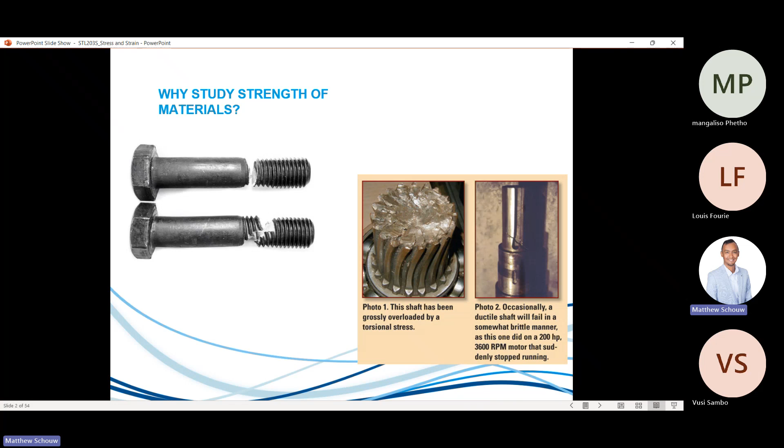This was a shaft which was grossly overloaded by torsional stress, that's like a twisting motion, and it just completely snaps off. By the way, that's a mechanical element, essentially a shaft. So again, we want to make sure whatever mechanical structure we have is going to last for some time. That's the purpose of this.

I just want to give you some examples of mechanical structures. This is from Wikipedia: boilers and pressure vessels, coaches and carriages, cranes, elevators, escalators, marine vessels and hulls, meaning the actual ship. There's a lot more mechanical structures. So the mindset you must have when doing these things is that it's all about having a structure.

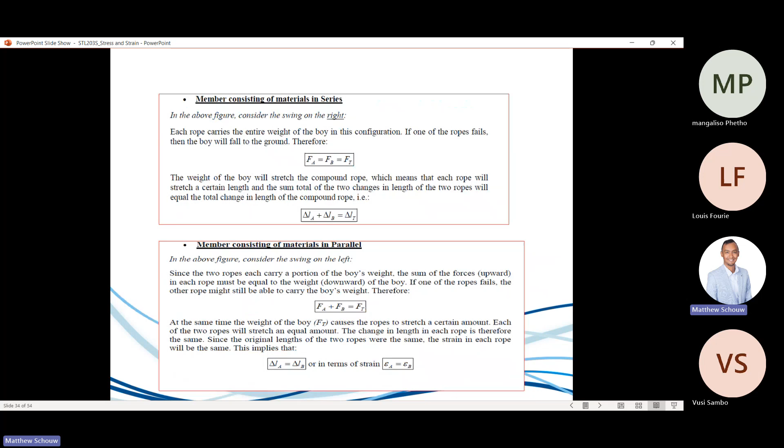I'm looking for a particular image now, I'll show you what I mean by mechanical structure. There's a lot of stuff I have here, let me show you here. Okay yeah, where is this? Like this, this is a maritime thing. Where is this, allowing? Someone allow the person in now? Yeah, I can't even see. Okay cool, where's my slide now, just took 3 minutes off now.

Excuse me guys, is this person... I don't know where this person is. Don't want to get into the meeting, but now I can't even see where they are. Oh there we go, okay, I'm allowing them, yeah there we go, okay.

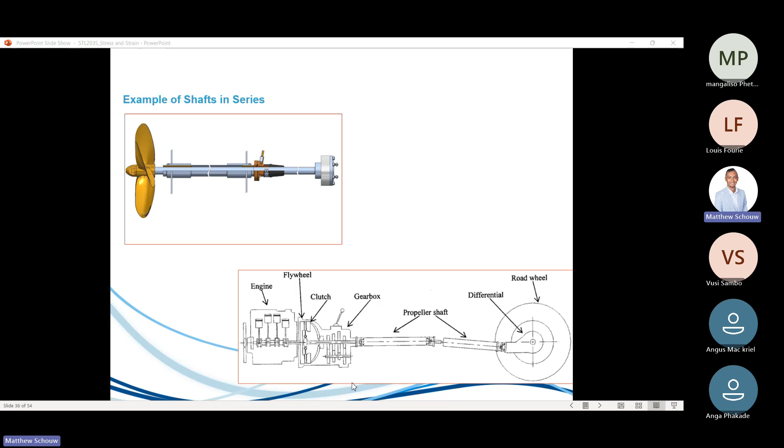It's all about looking at an element under the influence of an externally applied load. So we have an element, being a shaft maybe, or some kind of structure. We apply loads to it, and then we can see how it behaves. Obviously, when we're seeing how it behaves, we don't want that structure to fail. Like, what are its limits?

Yes. So that's the mindset you want to be using here. When we do the analysis of a structure, you look at a particular structure and determine what loads are present on it, and then based on those loads, which all have their own set of equations, we'll be able to determine the size of the element we must design, or predict when that thing will fail. So this is what the whole course is essentially about, but in different individual components.

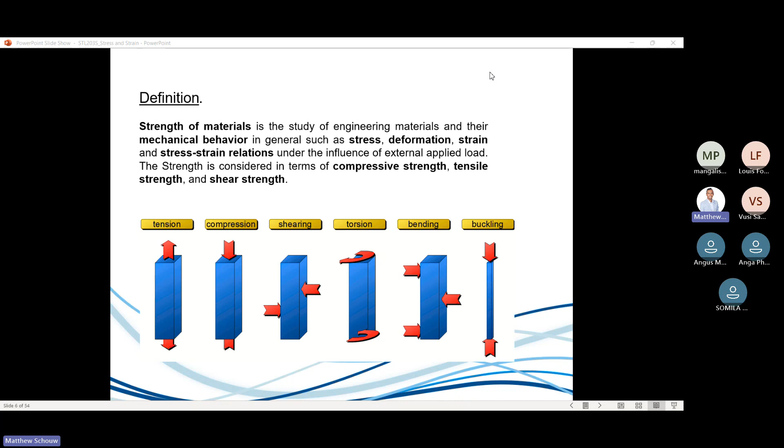I'm still following. So what I'm going to do now is move on to actually solving problems. I'm going to do a small warm up just to give you a feel of how I conduct the tutoring lessons, and then I'd like us to work through the problems I've sent you. But please, guys, engage as much as possible. I really want you guys to be successful for whatever individual goals we have.

So let me quickly just share the whiteboard, and then let's begin. Here's the whiteboard. Okay, just give me a second. This is not what I'm looking for. Window. Okay, here we go. So this is on the assumption that you guys have an idea of what the chapter is about. So this is where we are.

Okay, I'm going to leave it to the house and ask anyone: what's the formula for stress? Does everyone know the formula for stress? Yes, sir. Give it to me, man. Area. Give it to me, please.

It's force over area. Sigma is force over area, right? Is everyone aware of this? Let me check everyone's names. Okay, Vusi, yeah, everyone, nice. Angus, Anga, Sumila, right? That's the formula for stress, right?

And again, students, when you look at this, always imagine a formula to be the relationship between variables, right? I'll say it again. A formula is a relationship, equals a relationship between variables. Very important, it's not just the formula, it's the relationship between variables. I'm being very lectury here now, but I'm giving you that mindset which is very necessary. So what I mean is, if you increase the force, what happens to the stress?

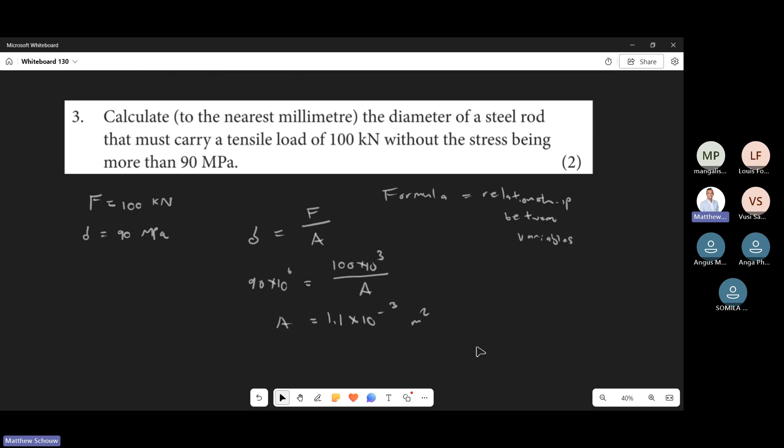Fine, meters squared, right? Okay, so what's important in this particular section? You must obviously know your areas, that is standard over there.

So because we're dealing with a steel rod, I'm sure you guys don't know what a rod is. I should rather say shaft, looks something like that. Just forgive my skew drawing, right? I have to mention this, and I'll mention it now. The cross section here, right, is a circle.

So obviously the high school way is pi r squared, right? But the big man way is pi d squared over 4. This is the same thing. The reason why we particularly use this one is when you buy shafts, we don't say to a supplier give me a shaft radius of, you know, 10 millimeters. We talk diameter, so we prefer to use that one.

So then what we do now, the area for that, it's going to be pi over 4 d squared equals 1.1 times that, and obviously we should solve for d squared. I believe you all can do that.

I'll just set it up for you guys here. Times 4 divided by pi, times 4 divided by pi, and obviously we must root this guy, right?

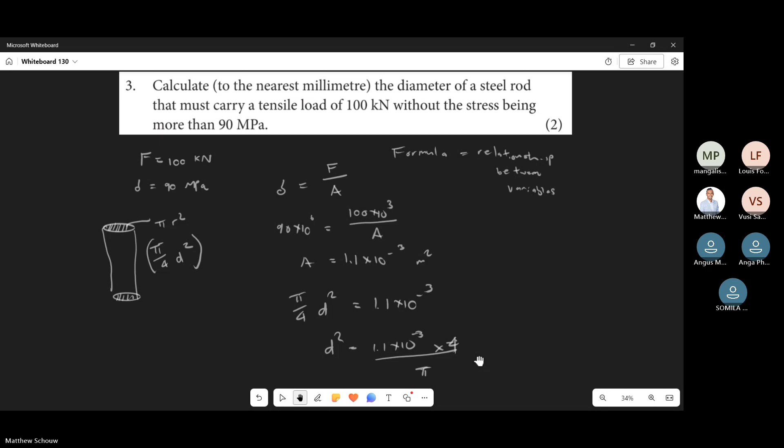Vusi, Angus, guys, what is my diameter there? I don't have a calculator on me as I'm in my car driving and sitting in the class at the same time. Okay, cool, no stress, man. No stress.

It's 37.612 times 10 to the power -3. Okay, 37 point. Let me just check here. Can we all agree on that answer? I'm not even sure, I'm working it out now.

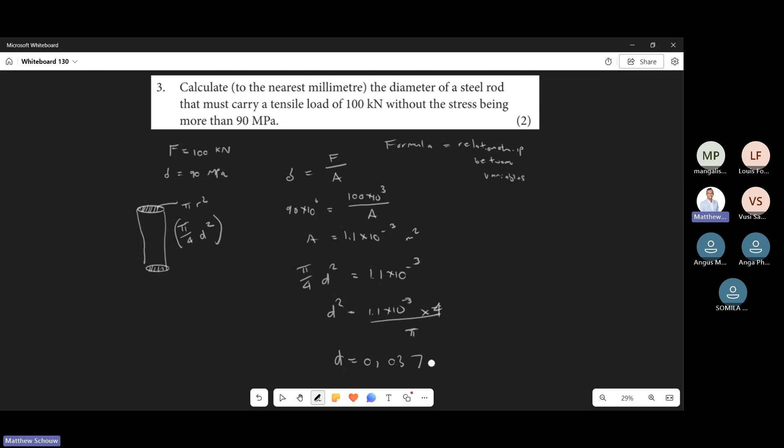Yeah, so it's in meters. 0.0, just give me a second. 0.037, so you get 6, right? I get 4 for somebody. Okay, yeah, say 4.2, yeah, it's 376. Yeah, okay, that's fine. I get 0.03742. I'm using the exact value, and I didn't add the other decimal places.

I don't even think we save those values. Yeah, I used the area I got, the 1,111. Yeah, so Louis is more accurate. But okay, that's fine, so we'll just call it around 37, and obviously this is in meters, therefore we're talking 37.42 millimeters.

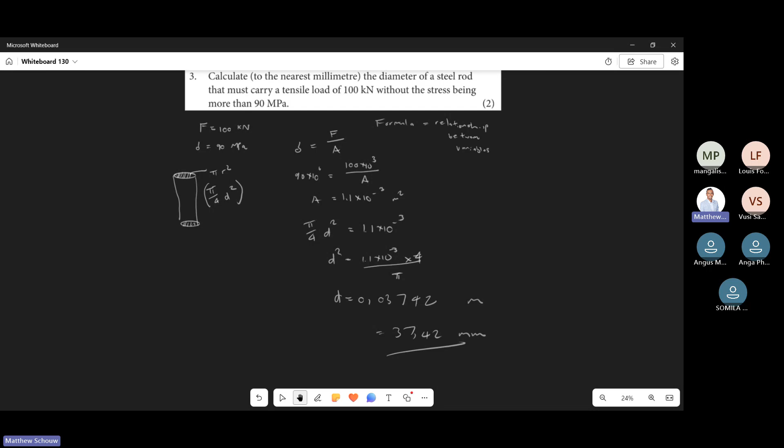I do want to make you aware, and this is obviously just me being a lecturer again. The area we always talk about, right, and I'm going to paste this image for you here before we proceed to those questions which I've given to you. Okay, you must always remember, right, when we are computing for stress, right, it must be the area. Just give me a second. We always use the area perpendicular to the force. I hope that's clear to everyone, right?

So if the force is here, it must be that area over there. It confuses a lot of students, so it must always be like on this face over here. I'll show you now, so you see what the force... Yes, go for it. So with the first question you shared with us in the homework, I first used the wrong area and then afterwards, okay. Yes, you see what I mean? That's why I'm mentioning it, it must be that area. A lot of people get confused.

And this is only, right, Louis, for when it's a tensile and a compressive load, you see what I'm saying to you? I'll make a note. Yeah, so that's why I'm deliberately bringing it up, because a lot of people think... so when you're dealing with shear, for instance, the area is completely different now. You see? So that is why I'm just throwing it out for everyone.

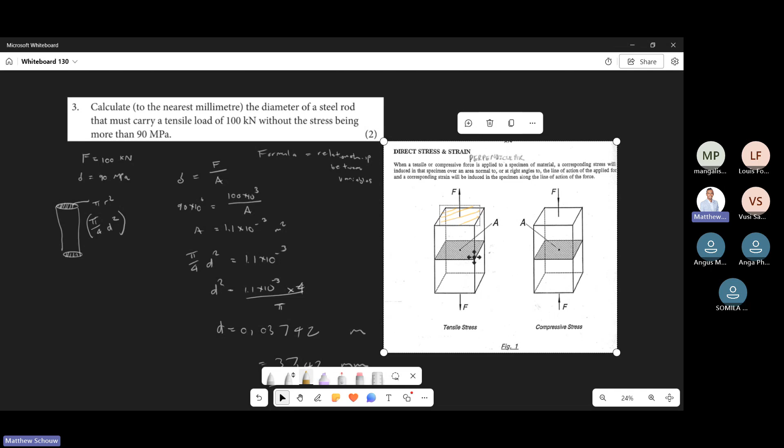So I've got a question: what will the area be in a cylinder, for example a tube but not a solid center? It's like a tube. I know, brother, got you. So if we have a tube like that, right, you know, I hope you can... when you go draw a thing. Okay, got that right? Like this.

That's hollow, you mean? Yeah, hollow in the center. And then let's say we're putting a load exactly in the middle, right?

We must be careful of the scenario, but there's a theoretical thing here. What you basically do, the area is going to be pi over 4 times big D, which is the diameter of the outside, minus the diameter of the inside. Okay, so that will be the mean diameter of the cylinder. That's what I mean, the mean. It's the actual area, remember we're talking about area here.

So not mean. So we're taking this area over here, this over here, this over here. So it's the big D minus the small one in the middle. That's what we're looking at, assuming the load is applied exactly where I'm showing you. Am I clear? Okay, 100% chance.

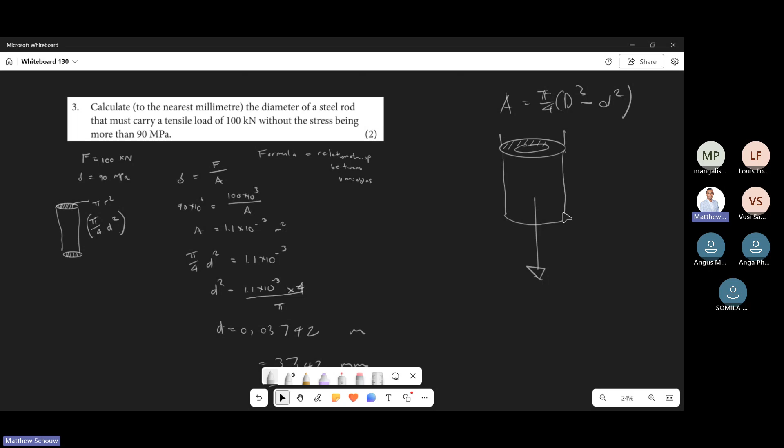Okay, students, let's move on to the tutorial, right? I think that was just a warm up to see where we are, and we're going to pursue that tutorial. Let me just put that question up for you, and then we can begin.

I don't know if everyone has solved this. Do you want me to give you an opportunity to try and solve it at least? So this is the question.

Okay, so again, I think the figure number is wrong. So what's happening here, guys? We have this bar with a hole in the middle. I'm not sure exactly where we might see this in a real life basis. And what we're basically doing is applying a 15 kilonewton load, and what they want from this is the stress induced within this particular thing.

Okay, so again it's a basic problem, and that's going to be stress equals force over area, right? So I'd like to go to the house. Guys, tell me, which area do we use here?

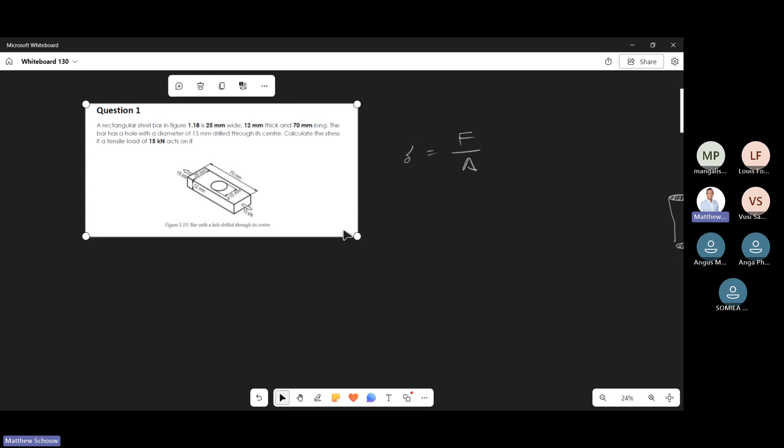Can someone tell me? I'm just going to put this here. I can tell you, as I made a mistake of using the wrong one, but it's the 25 millimeter and the 12 millimeter. Yes, it's not the 25 and the 70, but the 25 and the 12. You work out the area of that side.

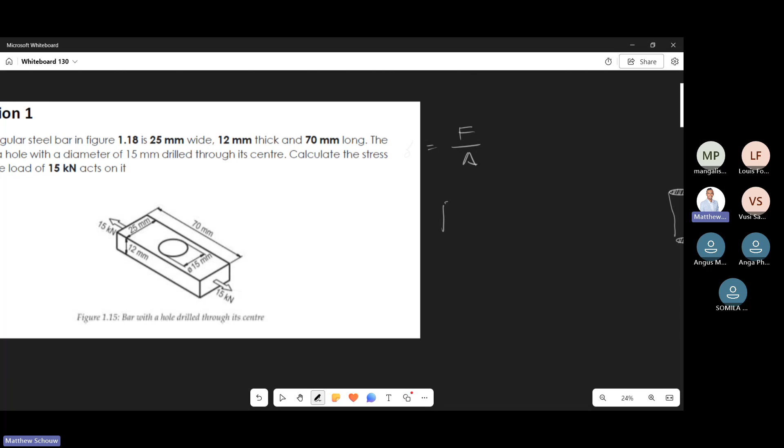Yes, that's correct. So if I'm going to do a side view of this one, right? So the bar looks like this, assuming the force is coming exactly in the middle. What you can also see here, right? We have this circle, actually this over here.

You agree with me, right? So the force is coming exactly in this middle. Do you see this over here? So this is now the hole, guys, right? I'm sure we know drawings, right?

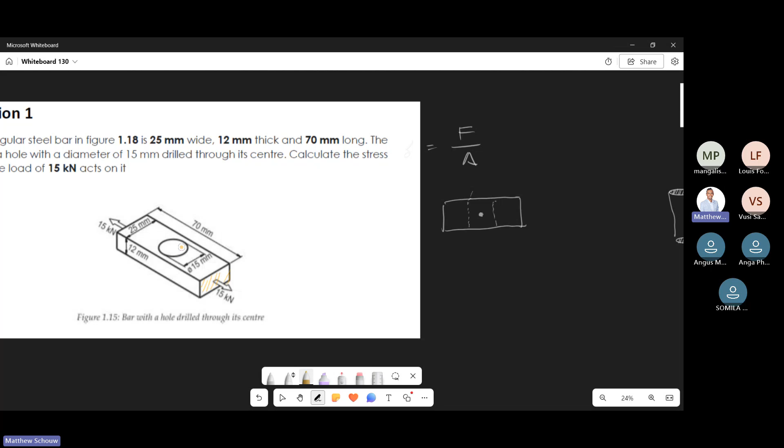And the area we're using is this area, colleagues, this one over here. You see here? That one. But we must bear in mind, we've got a hole in the middle. You see there? So the area for this one is going to be 12.

And 25. However, we've lost some length in the middle. So this is 25, and that's going to be 12. So the actual area, I hope you agree with me here, the area in this case is going to be 25.

It's going to be minus this. Remember, we have to minus this portion in the middle here, right? You guys agree with me? Minus the 15, then times by the 12. Obviously this is going to be in millimeters. Are we all on the same page here?

I'll write it better: 0.025 minus 0.015, times 0.012. Are we all on the same page? I did it a bit different - I worked out the rectangular area, and then the hole, and then I just subtracted the one from the other. That's fine.

The answer for this, let me just check this answer. So it should be like this. I don't know what answer you got. The answer for this was, let me just quickly check, it should be 125 megapascals. That's the actual answer.

I got 121.6, so I don't... it's a bit out. It should be 125, I got 121.67 megapascals. Oh I see, nah, so it should be this. What I'm saying is that this is a cross-sectional area, but we have to subtract this portion here because this is not here - you know what I'm saying? The load is coming through here, the area in question is actually this area over here.

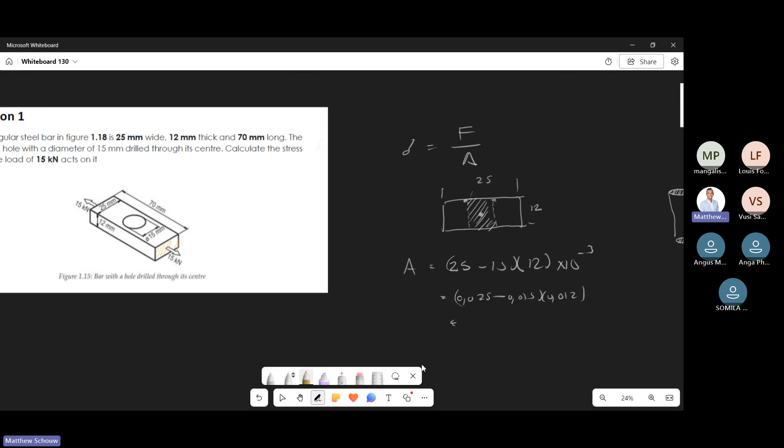I'm trying to get you on the same page. So remember, we have to use this area here. I don't know if you can all see that, this area over here. But remember that there's a hole here, you see there? So what I'm saying is if you look here, I'm drawing an eye.

We'll see, right? This is the view you see, right? So what I've done here is shown you that there's a hole over here, this portion here.

So what I'm saying is that when you're applying a load through the center, imagine the force coming out of the page, this green dot, it's being pulled out. The area you need is to look at this area over here, so you must say 25 minus that hole.

Remember, this is diameter, so it's from here to here, it's a diameter of 15. So it's 25 minus 15, which will give you that side, and then this over here will be 12. It's kind of a trick question, this one.

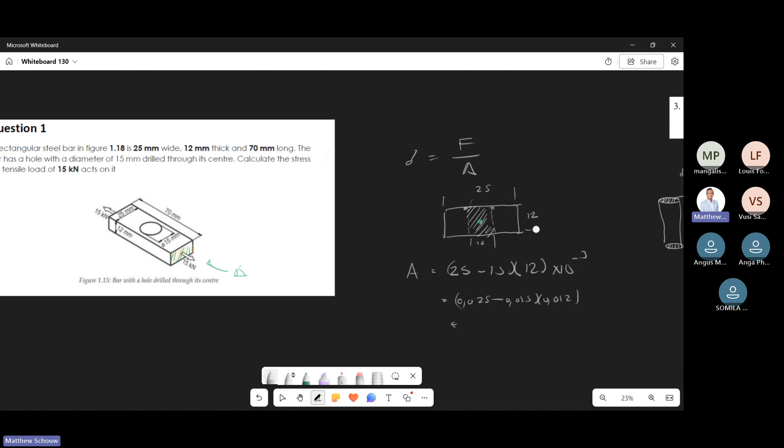What are you not understanding? What are you not seeing? Where is the 10 to the power negative 3 coming from then?

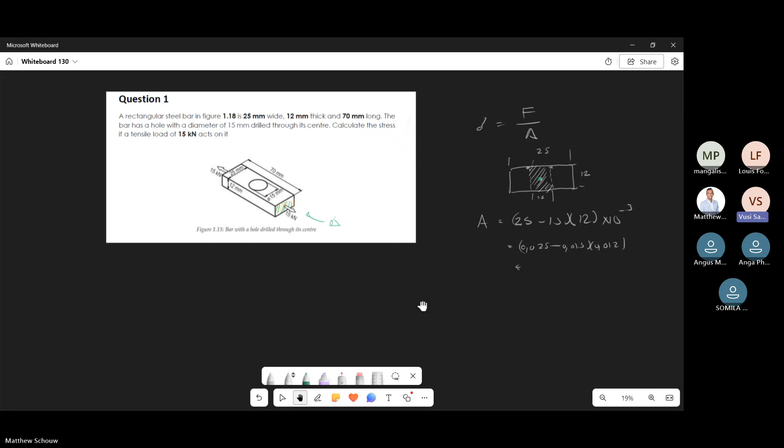Oh, so this is just a notation. Remember, 10 to the power negative 3 is a shortcut for millimeter, man. It's basically dividing by 1000. Remember, this is like, so we calculate stress in meters, not in millimeters.

100%. I was just confused by that 10 to the power negative 3, where is it coming from? Okay, so again, this is 1 times 10 to the power negative 3. If you remember your exponents, you can bring this down like this. And what's 10 to the power 3? It's 1000, so I'm basically dividing by 1000.

I understand that part, it's just that I was confused if we're working on meters or millimeters. So you're saying we're working on meters? Always meters, that's a base unit, 100%. Okay, thanks, okay, no, I understand now. Yeah, okay.

See, I'm treating like you guys know things, man, that is why I'm a bit cautious. Okay, so the area here you should get is 120 times 10 to the power negative 6 meters squared. Okay, that's the area there.

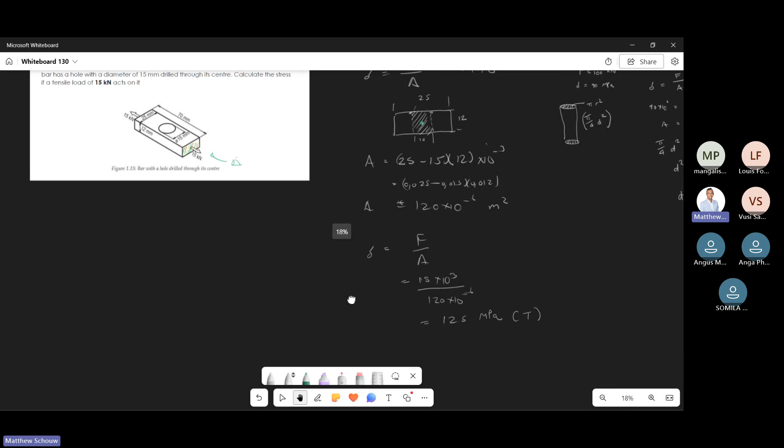Again, this is a different concept at play here in the next question, so I hope you're aware of these concepts. Okay, so I'm gonna paste it here like this. And there we go.

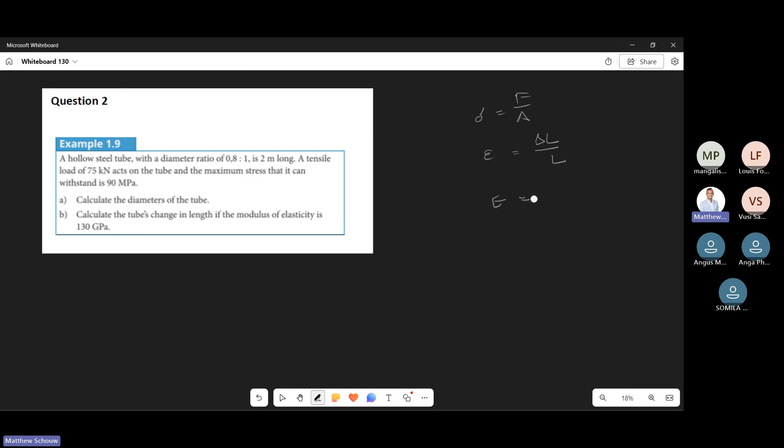I just want to put up the main formulas for this concept, which is stress over area - force over area, which is stress. They do mention something about change in length. There's a concept called strain, and strain is essentially the change in length over length, right? And the last one is your elastic modulus, which is stress over strain. Is anyone familiar with this concept? Did anyone go through the stuff?

Okay, so in this case, he's back to I think what Angus was asking. So we have a hollow steel tube, right? So it looks like this - some tube, a pipe if you will, maybe - goes like that. They actually use different formulas for pipes, but anyway, it's thin cylinder formulas.

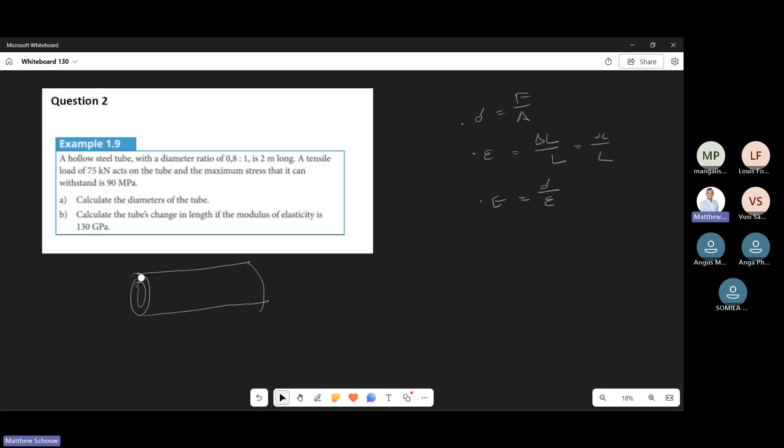So then what they're telling you here is there's a load on this pipe of 75 kilonewtons, right? We're not sure what this load could possibly be, maybe someone can tell us. It's applying this tensile load I believe, right? It's not being compressed, so the length is increasing. And they're telling you that the maximum stress of the pipe is 90.

What I find interesting about this, and I want to tell you guys, is that when they always give you the stress of a particular object, each material will have its own stresses. So like we have 316 austenitic steel, it has a yield stress of around 240 and a UTS of around 250.

So your stress is actually a given - what we're always actually working for is sizes. In this case, we're working for the diameters of the tube. There's a classical design thing in mechanical where you know the loading condition and the type of material you're going to use, and you need to determine what size of tube you must use to install everything. I hope I'm clear with everyone on the thinking of what's happening with this question.

So anyway, they're saying we have a diameter ratio of 0.8 to 1, right? So are they saying is it big D over small d? I'm not sure, is it small d over big D? The ratio is 0.8 to 1. I believe it's like this - am I correct? You think it's like that? Yes, it's like that, correct sir. Okay cool, I'm just making sure, you know, sometimes you can easily slip on such things.

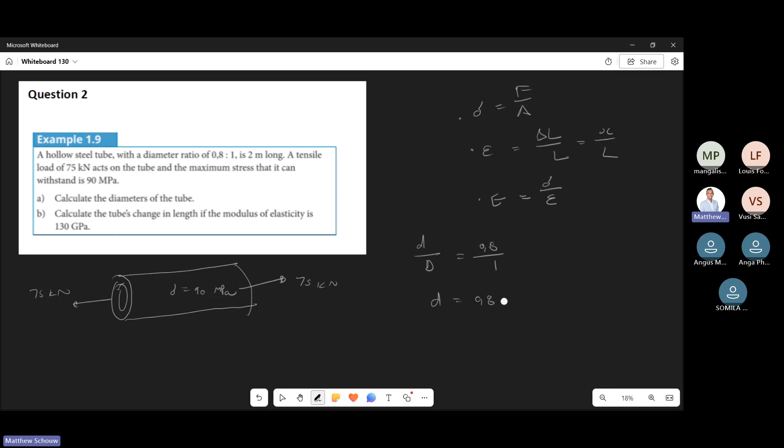So now, first thing we're going to do is get small d in terms of big D. I hope we're doing the right thing here - you never know these numbers, right? And so then we want to plug in and solve this thing. Okay let me quickly see - so we know our base formula, it's going to be stress equals force over area.

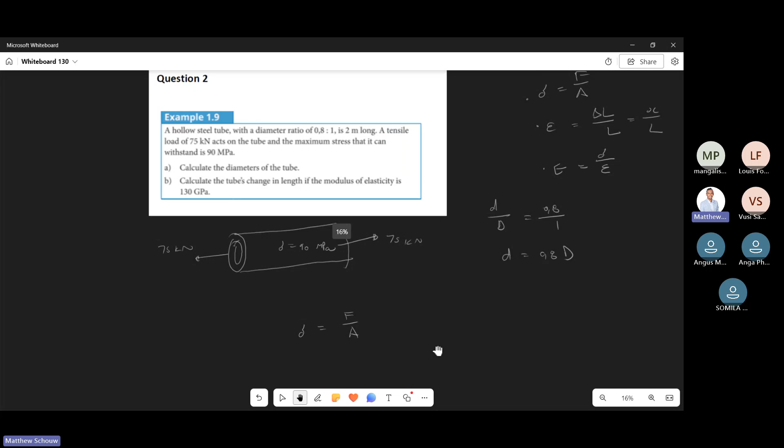We are given stress, which is 90 megapascals - that's stress within the tube. We've got a force of 75 kilonewtons, and therefore we must compute the area now, right? So what is the area? Okay, I'm going to work it out, you can just tell me.

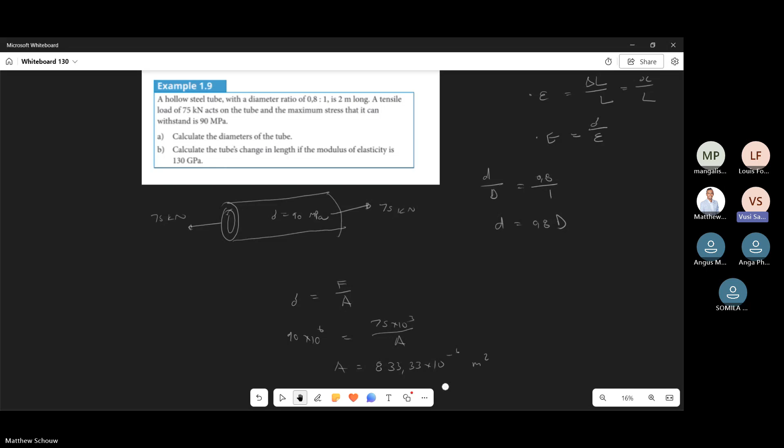You can just tell me if you agree with me. You should get 8.333 times 10 to the power negative 4 - can I go negative 6? Yeah, let me go negative 6 about that. So, 833.33 times 10 to the negative 6 meters squared. Okay, is everyone happy with that answer? Yes sir, yes sir - Louis, Angus, I think Angus said sir, yes, Vusi, sir, sure, yeah.

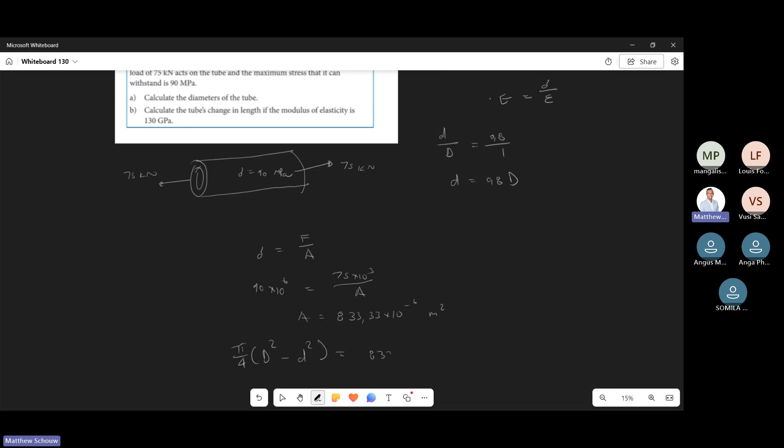Right, so then we know the area. So the area, again, is a tube, so it's going to be pi over 4, big D squared minus small d squared, equals 833.33 times 10 to the power negative 6.

I'll do the next step for you and you can solve for me. So we have small d in terms of big D, let's quickly do that. So it's pi over 4, which we can easily sort out. So we're going to keep big D, but we know that small d is 0.8 big D, right? But remember, we must close that off and we must square it - hope I'm clear to everyone.

Let me put square brackets here - we can just differentiate the brackets. So that's big D squared minus 0.8 big D squared, close that bracket off, equals 833.33 times 10 to the power negative 6. All right, are we happy with that?

So you guys have to solve that now - algebra. You guys concur with that over there? Vusi, Louis, Anga. Yes sir, 100%. Okay, so just try to solve for D there. Yeah.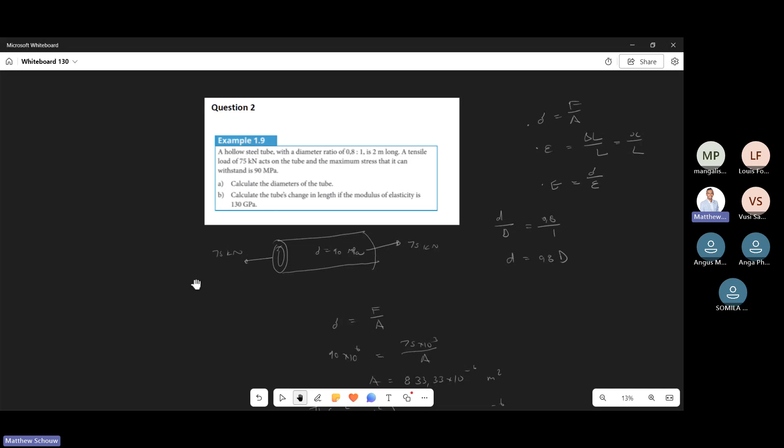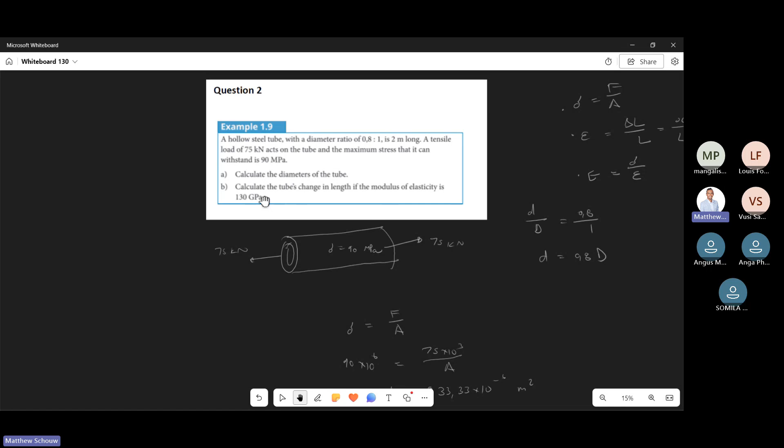Okay, great. So the next question is calculate the tube's change in length. So this, and I give you the elastic modulus of 130. Again, there is a material property. Different materials will have different elastic modulus. Steel has around 200. This could be copper, around 100 to 130 depending. Again, it's a material property that's given to you; it's known published data already.

So now we need to find the change in length. I just want to show you something quite useful. I'm using this formula: the elastic modulus equals stress over strain. We put it into its individual forms. I just want to show you something. Now I want to keep the stress. And then your strain is your change in length, which they call X in the Northlink N5 textbooks, divided by L.

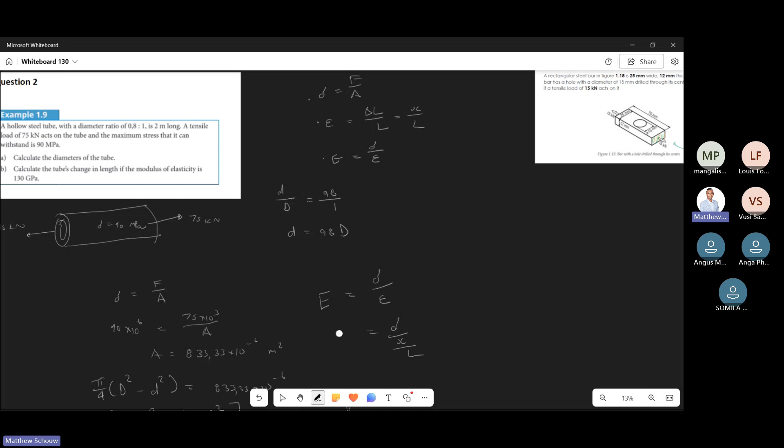Then if you do a nice flip and times of this, just give me a second... a nice flip and times of this, you get stress times L over X. And then you flip this, sort the elastic modulus out, E, and you have stress L E. So this is a nice short formula, stress L E, which will give you the change in length immediately.

Are you guys familiar with that one? This is a quick manipulation of that formula to make your life easy. It becomes useful when you do compound bars anyway. Is anyone familiar with that? Somila, Anga, Angus, Louis - yes, okay. No, I'm not familiar with that, but seeing it as I go on. Yeah, okay, quite great, fantastic.

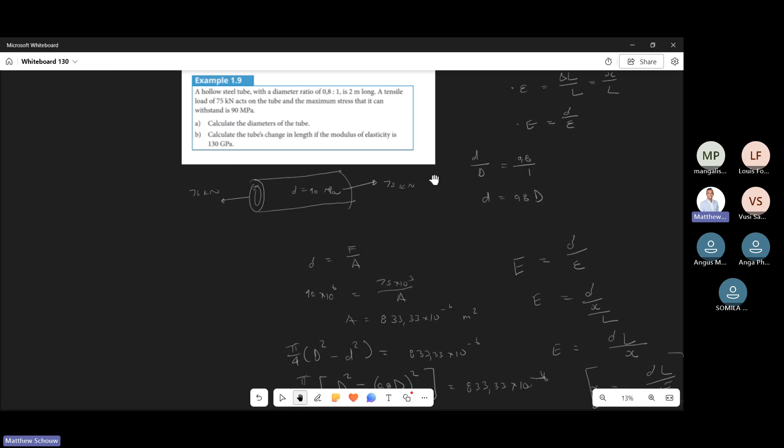Following, right. So again, this is important, you'll see in compound bars. This becomes very prevalent, which is part of the same chapter. So I'm just showing you right now, know this one, right? So anyway, they're asking for the tube's change in length, and they give you that there. So using that formula, this is going to be A. Just put B over here. We know that it's X equals stress L over E.

Stress is 90 megapascals. The length was given, I believe - it's a 2-meter long pipe. And then you divide that by 130 gigapascals, times 10 to the 9. What this value is telling us is that under this given load, how long this pipe actually extended by, and typically it's very small. So can we get that value from the other colleagues?

Okay, I'm getting 1.385 millimeters. 1.385 millimeters. Okay, thank you, Anga, thank you very much. So it should be 1.385 millimeters. So obviously that would be 0.00 - so you can see it actually extended by just over a mil. You can obviously check that out.

Okay, any questions guys? Is this straightforward? Are we on the same page? This is also 1.3846 - just writing it like this is all in meters. Colleagues, are we all on the same page?

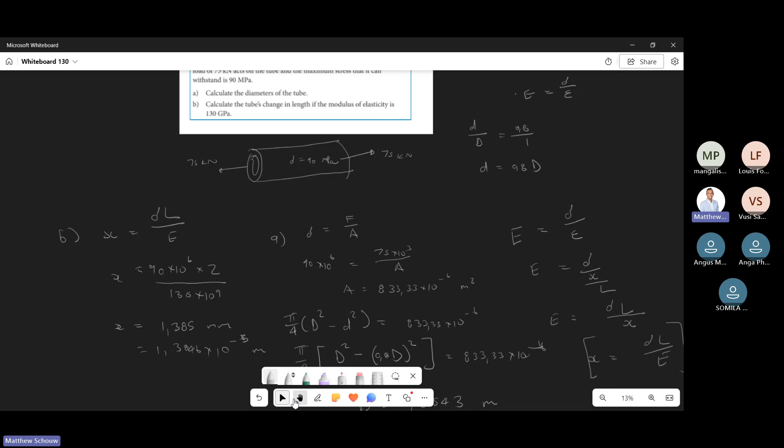Okay, maybe after the session we will talk about it. Let me park it for them. Okay. Alright. Okay.

Has anyone done this one as well? This question? No, sir, just... Okay. I also didn't attempt this one. Okay, great, that's fine.

All I want to say is, like, I realize this is like a trimester worth of work. I mean, I teach this kind of stuff in a semester. We all studied, so I don't know how people actually manage to do all of this stuff with proper detail and understanding in how many weeks is this? 2 months? 8 weeks? 8 weeks, that's ridiculous, man. I don't know, I don't want to say anything around that.

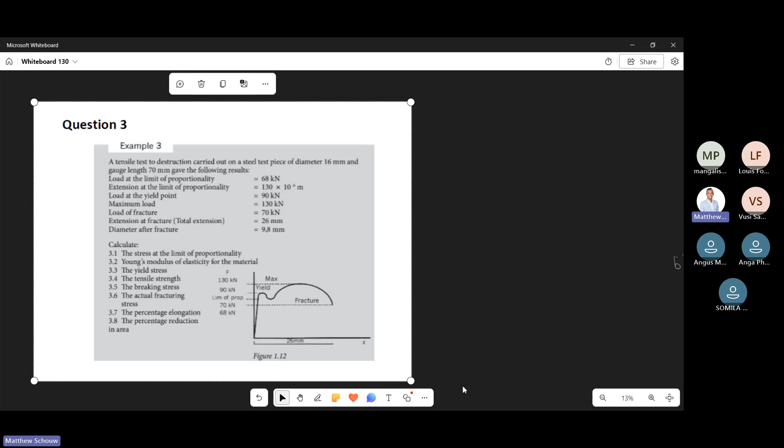Okay, so I'm trying my best to articulate this, right? This was my bread and butter for 4 years, so hopefully I can extend that knowledge nicely. I'm just going to quickly go back and share some slides, and with this, I could talk for 2 straight hours on this test alone, what you're seeing in front of you. Can you guys see the slides?

Yes, okay great, cool. So I don't know, has anyone ever seen a tensile test being conducted? Who's familiar with a tensile test? Not Angus necessarily a tensile test, but in the marine industry they normally do a loading test on a crane. Nice, so they fill a bag full of water, and then they see the load capacity, what is the safe working load, and if it exceeds the safe working load. Okay great. Also at Quebec they do it frequently to test the overhead cranes. Yeah yeah.

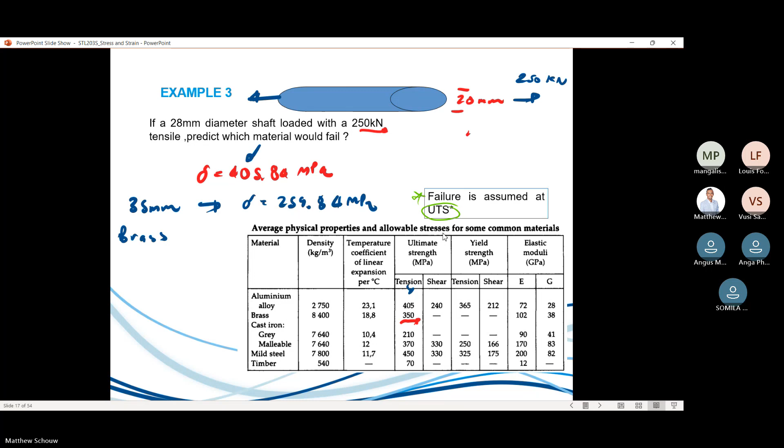Okay cool, so I'm gonna give you a quick rundown of what happens here. Hope you guys can follow, right? And I'll give you some practical experience of how it's actually being done. So what do we have, right? Let me give you the story first, man. Let me go to the story, and then I'll come back to the stuff here. It's a lot of examples.

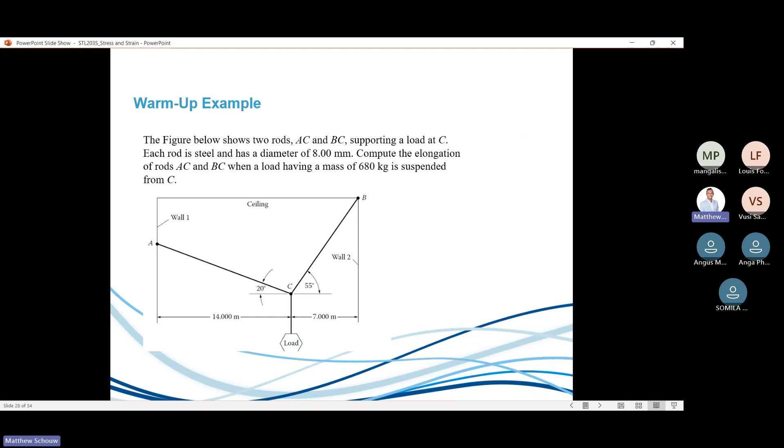So this is a typical story of how it works, right? Someone joining you. So this is when I was working at this company called Gascon. They were building pressure vessels, both marine and there's more. How it typically works: before you build any structure, right?

You typically order a plate from a supplier, right? Now depending on the supplier, if the supplier is good, they'll issue it with a 3.2 certificate. That 3.2 certificate is basically telling you that the mill where they manufactured the plate has been tested, and then an inspector, a third-party inspector, has witnessed a retest of that. So what I would typically get is 3.1 certificates, and we had to retest the material to ensure that the material is exactly what they say it is.

So a material will come in, right? We'll get a material certificate. On the material certificate, it was from China. We can't really trust Chinese, I shouldn't be saying that, but they'll give you values, man. They'll actually give you the UTS, it's all in this, they give you the chemical composition. Let me just make it big for you. Time to make this video educational. Oh there we go. What happened now?

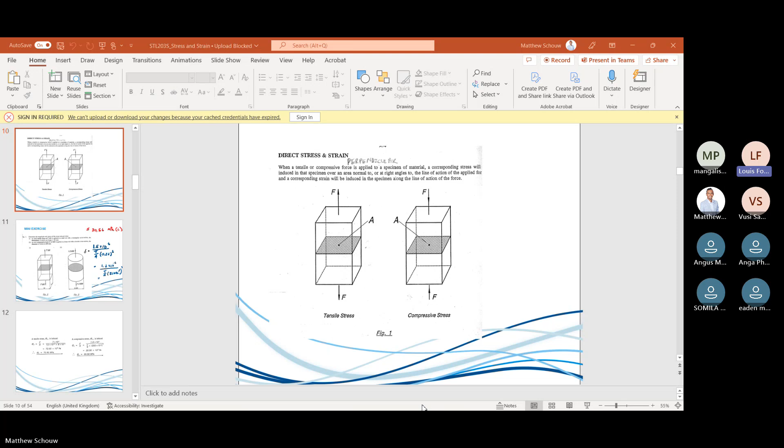Can you see there? That's an actual material test certificate, right? It tells you the heat number, the cast number of the particular plate, the dimension, the weight. Can you guys see all this YS and TS and EL? Sorry sir, the chart's not showing. I'm not sure if it's just me. Okay, let me just have a look again.

So basically all plates have a standard. I don't know if I'm making sense. Like stainless steel has its own one, high carbon steel, medium carbon steel, low carbon steel have their own one. So I hope you all get that in terms of this thing. So this is what actually happens, right?

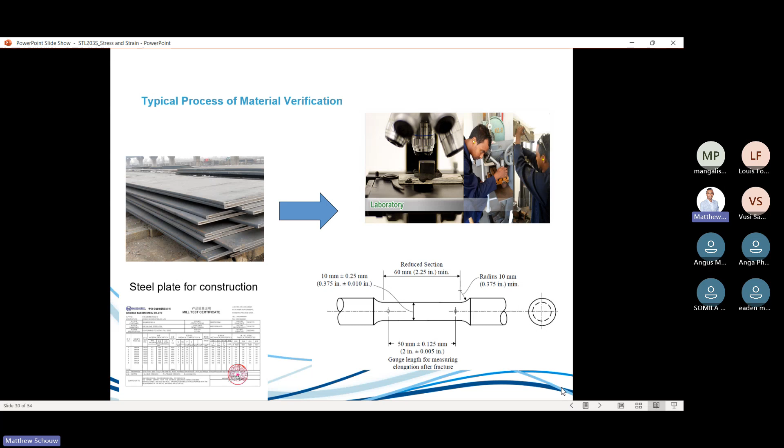So the objective is we're talking about a tensile test here, which is a very common test. There is a lab in Cape Town which does it as well. Again, I want to make you aware that there are actual grades or standards for each type of plate.

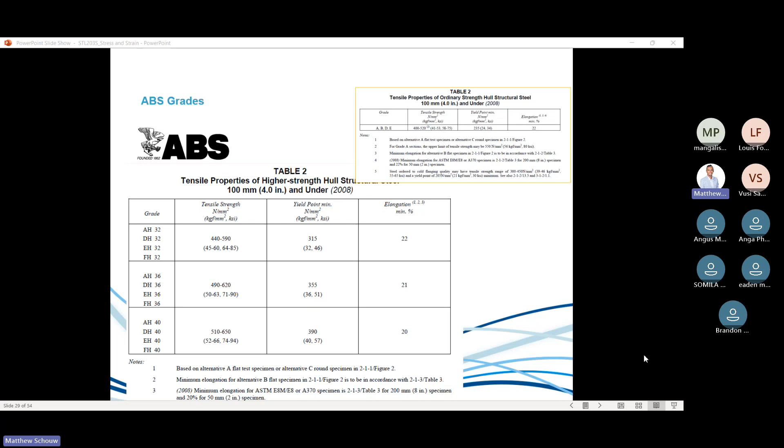Yeah, so that's exactly what happens. We clip, on the left hand side is the head where it's stationary, and then the other side is basically how we pull it, and it does exactly like that. And then eventually it breaks.

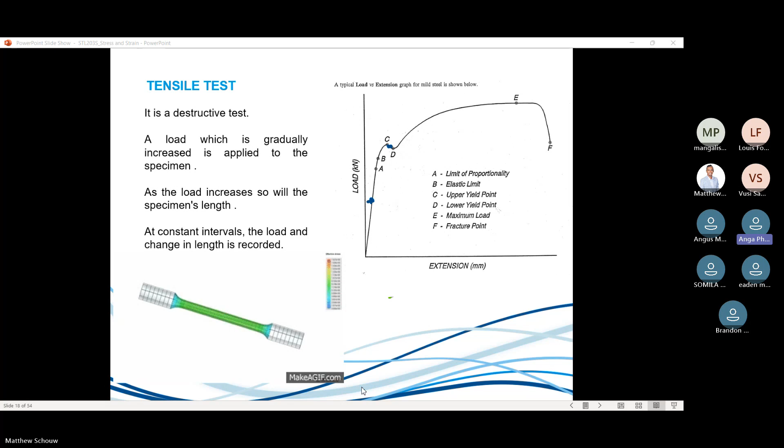Camilla, Brandon, Eden. Is it Aiden? We don't have any questions. I think we can continue. Okay, thanks. Eden, okay, thanks. Aiden, okay.

Yeah, so that's basically what happens with the actual tensile test, guys. From the load extension graph, basically what we do is divide this by area and divide that by length, and we get the stress and strain, which we kind of talked about just earlier on.

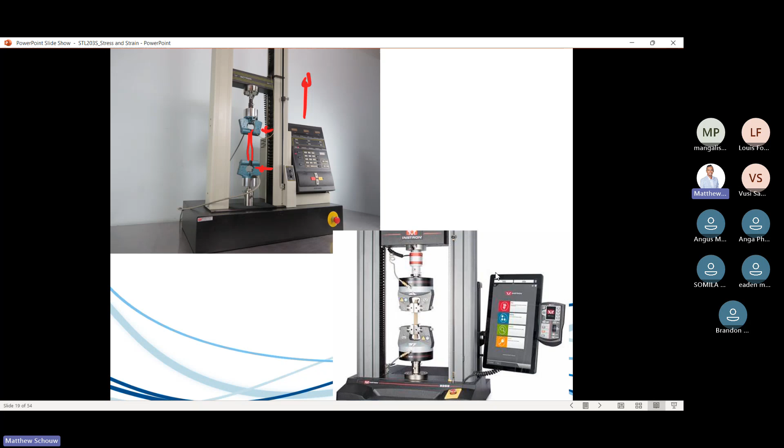We're just gonna, again, I don't know if you can see the slides. This is basically what it looks like over here. I did do this lecture, I think it's on a YouTube channel which I posted, and maybe if you guys would like to watch it, you can always just watch it in your own time. But anyway, that's what's going on here. So let's start to solve that particular problem.

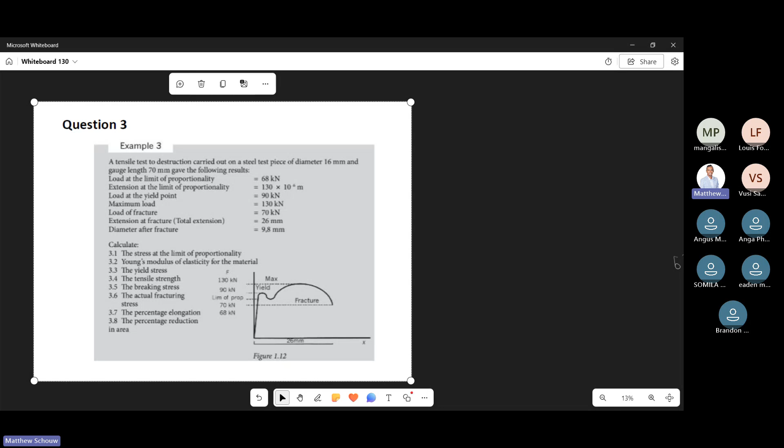the stress at the limit of proportionality, right? So you have to look at the graph, and over here, they tell you here the load at proportionality is 68 kilonewtons, which is over there, and giving you the extension. So that's the first thing. So again, my stress, if you recall, stress is force over area.

Okay, and so what happens is here, we now have to take the actual stress over here, which is the force at the limit of proportionality, which is 68, divided by the actual area there. So the area, again, is a steel test piece of diameter 16 mil. So that's going to be pi over 4 times 0.016 squared. That's the first one. Colleagues, are we all on the same page here?

Yes. Yeah, so basically pulling data from there, and we're just going to use the basic formulas over here. Okay, so can Anga maybe give me that stress? What is the stress there?

Louis or Somila? 338.204. Okay, megapascals. 338.204. That's what I'm getting, megapascals. Yeah, that's definitely correct.

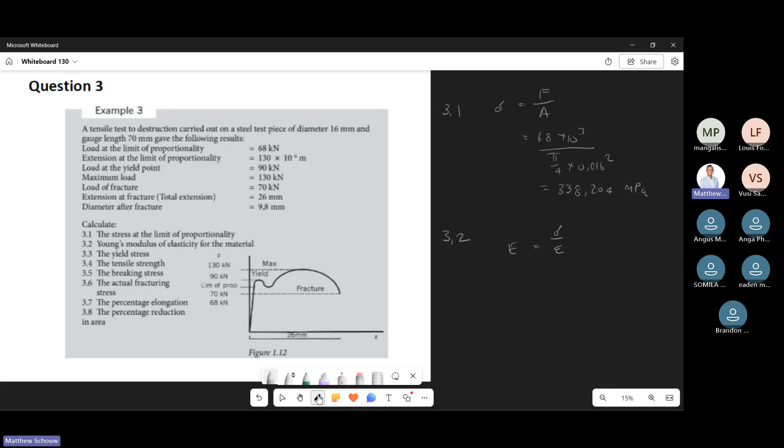Now the next thing is called the Young's modulus, and I didn't mention it in the previous one. So the Young's modulus, guys, you can only calculate within the limit of proportionality over here. It's this, they get E over here. Okay, so that's E, that's your elastic modulus.

It's basically the gradient, well, it's the gradient of that line over there, so stress over strain. In this case, load over extension, but yeah, it's the same thing. So we require the stress value and the strain at that particular point.

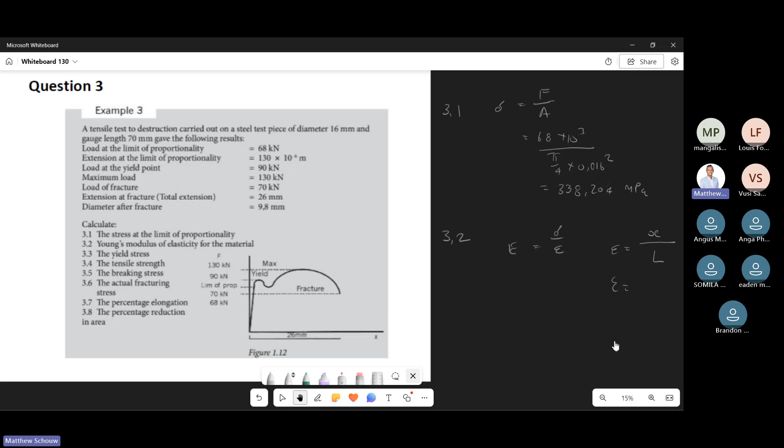Can we get that strain, please? So the change in length was given there, 130. Right? Colleagues, are we still here? Are we tired from work? It's 2.653. Is that all? Okay, so what did you do here? You said 130 divided by what?

Is anyone aware of which length to use? Is that the original length or the change in length, sir? The top is the change in length, the bottom is the original length, L, which is essentially the gauge length, the 70 millimeters, that's the actual length here. So we can have that as 70 times 10 to the power negative 3, or 0.07, entirely up to you.

Chief, your answer, I'm not sure if I just missed you. No, I made a mistake, sorry. Okay. Yeah guys, I don't know how you're going to do this. I'm getting 1.857 millimeters. That's correct, Angus. I get the same, yes. Yeah, so that's the strain, right?

Yeah, okay, so once we have that, we can basically put the stress in and put the strain in. Again guys, the elastic modulus only works in the limit of proportionality. I hope that is clear to everyone. You cannot use any other values besides that. Okay, so we just put in

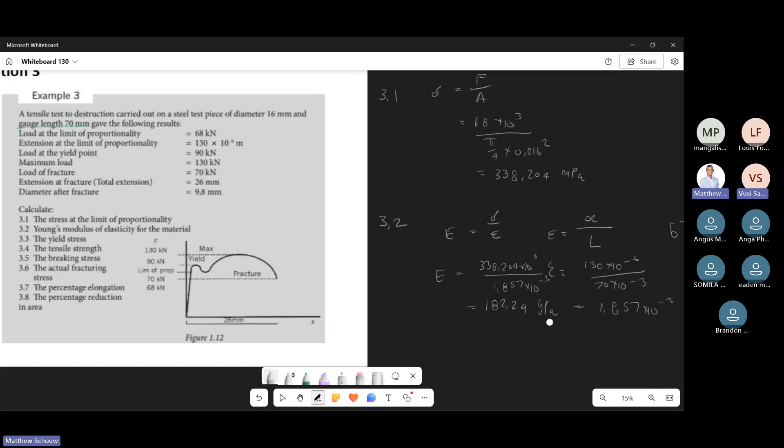Okay, right. Can we move on? Yes, sure, okay. So now let's look at something called the yield stress, right?

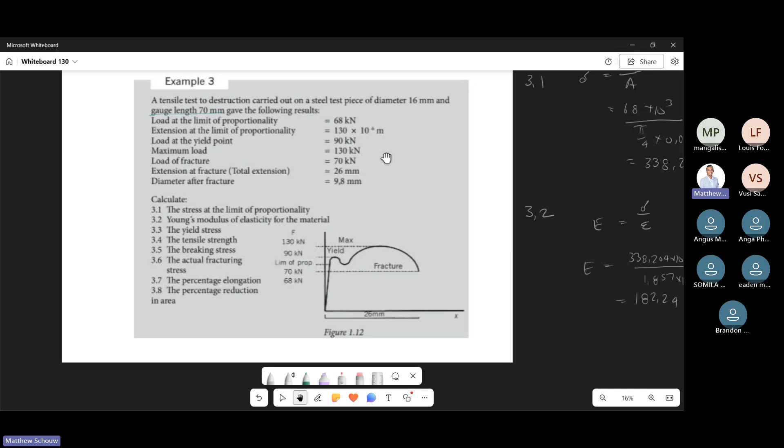Very important factor, again the yield stress. If any stress is more than the yield, it will start to permanently deform. Anything less, it will retain its shape. So the yield will be typically given, it's 90 kilonewtons, and we have to use still the same area as before. So all we do is locate where the yield is. In this case the yield is given as 90 kilonewtons over there, so that's force over area.

That's 90 kilonewtons, and we divide it by that area we got at the start over here. There's a lot of contentious issues with area, but anyway, I don't want to get into that now. Okay, so it would be 90 divided by pi over 4, 16 millimeters squared. What do we get there?

Colleagues, are we all at home or? I got it, getting it, it's fine. Go ahead, 447. How much? Louis or Anga, you were saying something? 447.623 megapascals. I get the same, yes. 447.662, 23, yeah, 623 megapascals. Okay, got you. Okay, MPa, that's correct.

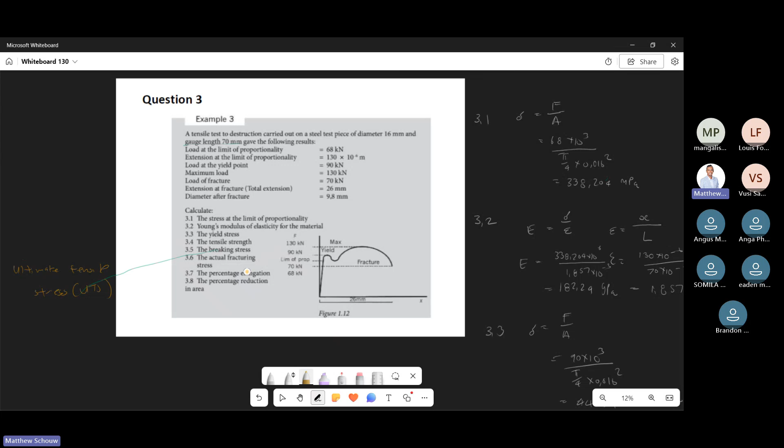Okay, so I was keeping, yes, the strength. I was keeping 3.4. Let's go 3.4. Oh my bad, I meant 3.4, the tensile strength. Sorry, they should have said the tensile strength, the ultimate tensile strength. So it's the same thing, it's 3.4 actually.

Sorry about that, I'm not talking about breaking, I'm talking about that one. Sorry, because breaking, they're using different terminologies here, which is a bit of a problem. So the tensile strength is actually the ultimate tensile strength, which is the max over here, this part here, that's what that actually is. So now we need to use the maximum load, and again we have to use the same area. That's what I'm saying, it's very contentious with the area, but we have to use the same area, right?

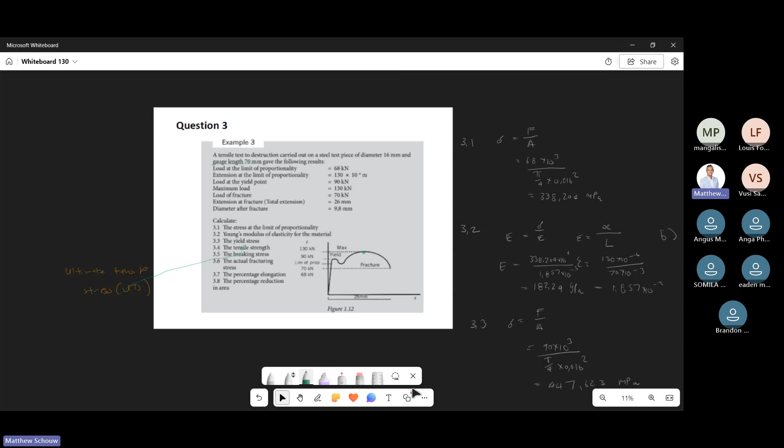Let's go over here. 3.4 is stress equals force over area. In that case, it's going to be 130 kilonewtons divided by that area again.

Normally the software can do this for you, so we typically get the values immediately. What do you get there for that one? That's 3.4.

646,567 megapascal, sorry. So it's 646.57. I got 567, but 571. No, that's fine. These are very real life values.

I've seen this, looks like a high carbon steel, especially with the 646 megapascals. That's the UTS, that's the maximum load. Now let's look at 3.5, I'm sure everyone got that.

Now we must be very particular with the next two. There's the breaking stress and the actual fracturing stress. We don't typically look at these values unless we want to go into detail with the material. Normally the yield and the UTS are the main ones on the macroscopic scale where we actually care.

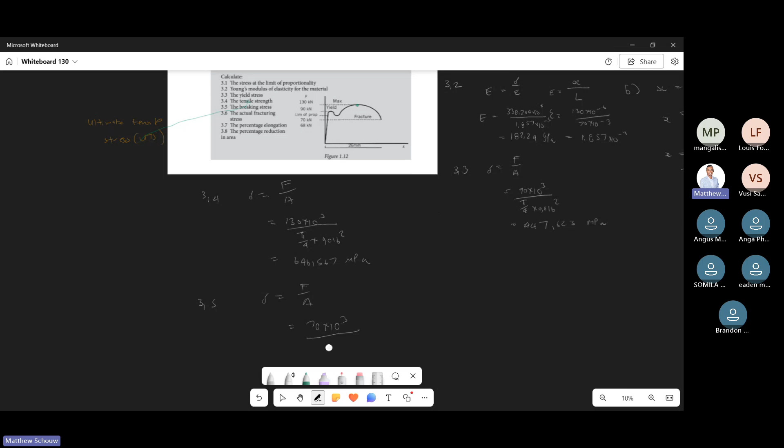But for the breaking stress, so to say, we have to use 70 kilonewtons, that's given over here just to show you, divided by the original area. So still 16, just be aware, I'm not sure what the other textbook says. So that's going to be 70 kilonewtons divided by pi over 4, you must know what that is. So that's the breaking stress.

So what do we get for that? I want to put 3.5 just here. That's the breaking stress, and that's on the original area. It's 348.151 megapascals. Okay, 348.151 megapascals, great, correct. Yes, so that's the breaking stress.

Now we're talking about why these are contentious with the area. So the area mostly stays the same until the limit of proportionality, and after that obviously the area decreases because the specimen is starting to break, it kind of necks, so to say. So when we want to compute the actual stress the specimen is under, that's going to be based on the area just before it actually fractures.

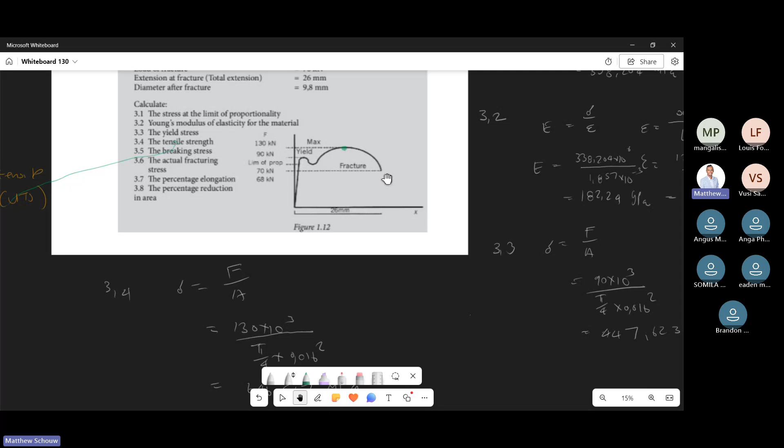And you'll find that over here, can you see diameter of the fracture, it's 9.8. So for the actual fracturing stress, you mustn't use 16 anymore, you have to use now the 9.8. Am I clear?

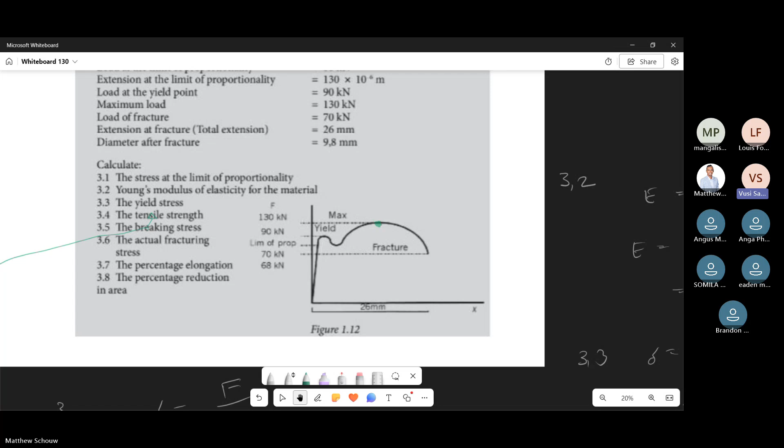I hope everyone is with me here. I want to perhaps show you, yeah I'll show you. So you have to use that next. It's just difficult for me to rush through things without teaching, but okay, I'll show you what it looks like here. A picture speaks a million words.

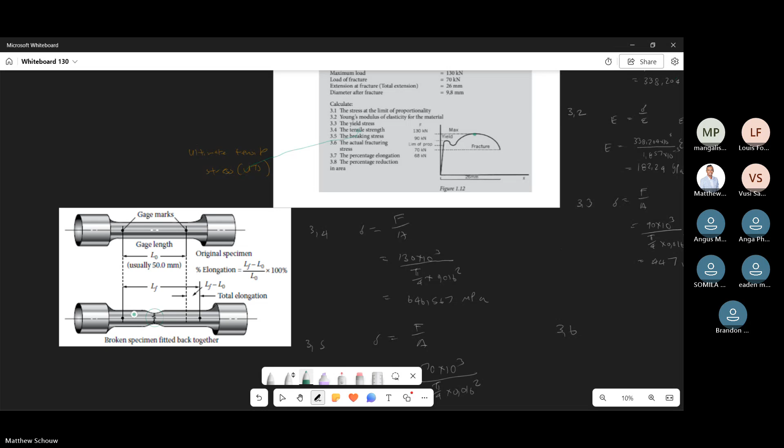So this is exactly what's happening here. Specimen looks like that, we have a gauge length. We break the specimen, it looks like that. So what I'm saying is, can you see now, once it's broken, there's a reduction in area from the original. I think we can all imagine this. So the area we're using now is that area. Am I clear? Yes sir. Okay, cool.

So let's use the 70 kilonewtons again, divide that by pi over 4 times 0.0098. Again, you can go 9.8 times 10 to negative 3, I believe it's 2 zeros there.

And this should be a very, very high value at the point of breaking. So very, very high value.

928.017. Okay, 928.017. Yeah, got it. Pascals. MPa, megapascals. I've never seen a load this high.

Actually, I'm lying, I did see something reach a gigapascal worth of load, but that was a massive diameter. Anyway, so again, the actual fracturing stress is at the point of breaking, which is that particular thing. Just making you aware.

Okay, now we're going to end off after those two questions, then I want us to have a small discussion, and then we're basically done. So I want to make you aware now, there are two metrics over here: this is called the percentage elongation and the percentage reduction in area.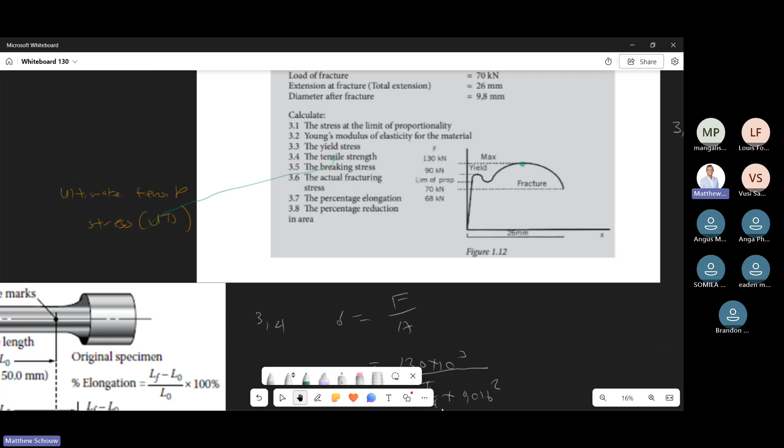Okay, so I just want to show you something quickly. I'll try not to lecture too much next time, hopefully you guys have went through the stuff. I don't know what you guys mind and don't mind, but anyway, we always talk. So I'll show you some typical graphs quickly.

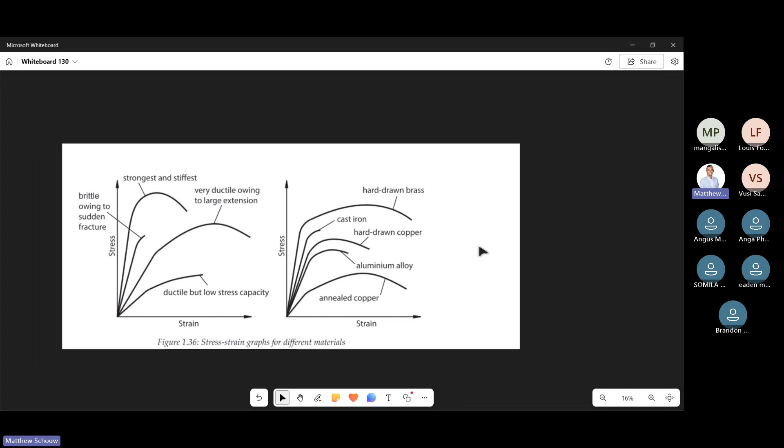Of stress and strain here, so see what it looks like. So you have different materials over here, can you see that? And materials which look typically around like that. This is what we call brittle, and that is what we call ductile.

What is the difference? So ductile basically is when we load the material, it kind of stretches, eventually breaks. And brittle is the converse, you load it up, and it just breaks immediately. Are we all on the same page there?

Yes. So that's the difference. So your typical carbon steel or mild steel, if you load it up, it'll stretch, and then break. So there's time to scream and the body collapses. But if you have like cast iron, for instance, and you load cast iron, it immediately reaches its maximum load and then it'll break immediately. It won't stop pulling, you know what I mean? It doesn't behave like an elastic.

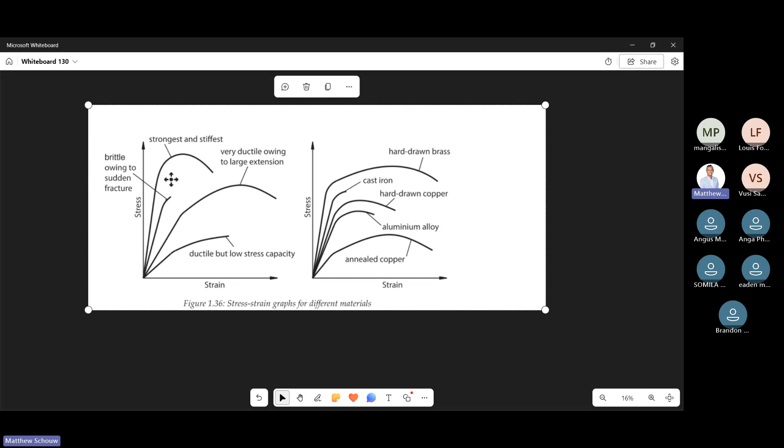It just breaks immediately. So ductility is like you have some time to scream, and brittleness or being brittle, there's no time to scream. It's basically sudden fracture. I hope you all got that. Okay? I hope it was useful.

But the reason why I'm mentioning this to you is because these values over here, your percentage elongation and reduction in area, tells you how ductile something is or how brittle something is. So typically values over 20% is deemed ductile, values less than 20% is deemed brittle. I don't think the textbook tells you that, but okay, cool.

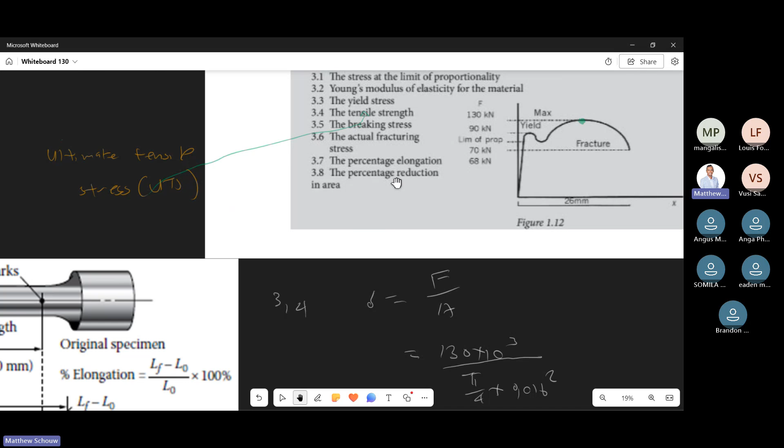How do we compute these values? Your percentage elongation, I think we're at 3.7 now. According to the textbook, I'll also write it out the way they're writing it. It's going to be percent elongation equals change in length over your original length, times 100. Okay, so that's percentage elongation.

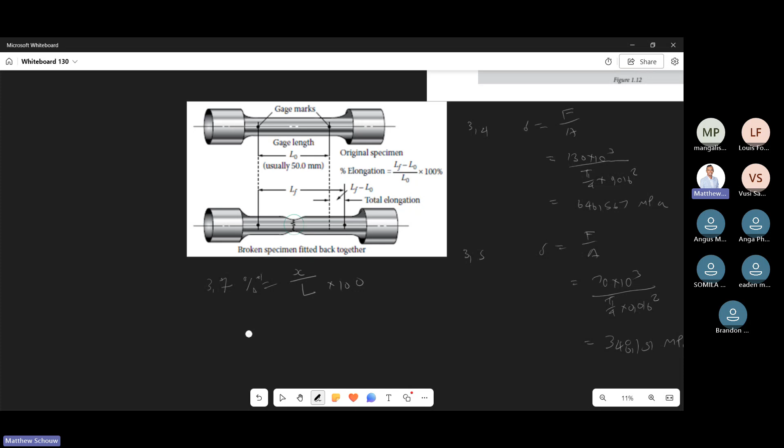So then what we have to do is go back to our increase in that over there, the total extension, sorry, that's 26 mm. Can you guys see that? We take the total extension which has happened, and then we just divide it by the gauge length of 70 mm. That'll give us the percentage elongation.

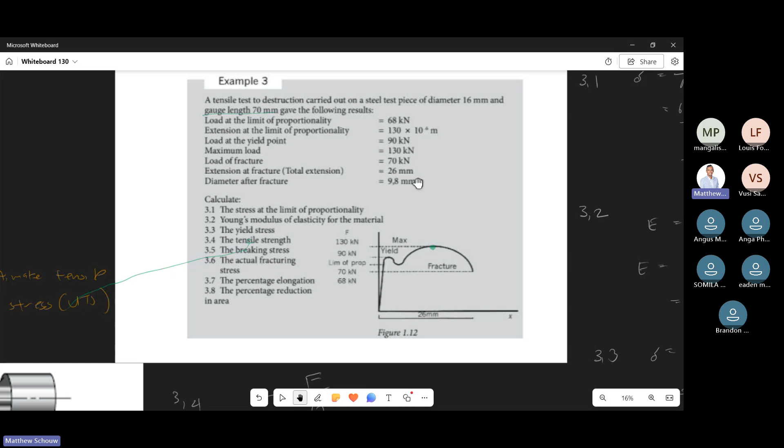Okay, is it clear to everyone? So take the extension at fracture, the total extension, and divide it by 70. So that's 26 divided by 70, times 100. Times it by 100, obviously it'll be in percent, so it'll be 37.142%, maybe 143.

Did we all get this? Yes. So that tells you it's more than 20%, that this is a very ductile material, right? It'll stretch before it breaks.

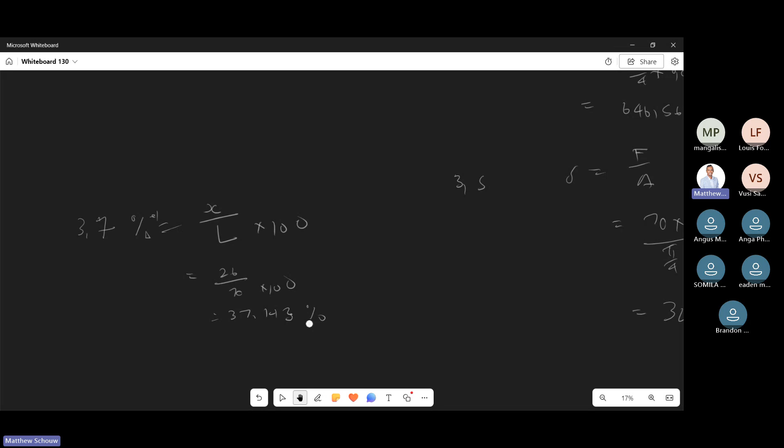The other metric we use, and this metric is used also for tensile testing, but it's normally for through-thickness tests, to ensure that, because sometimes we load through the thickness of the plate. It's basically big D squared minus small d - just bear with me. It's the diameter before we conduct the test, the original diameter, and then minus the diameter at the fracture.

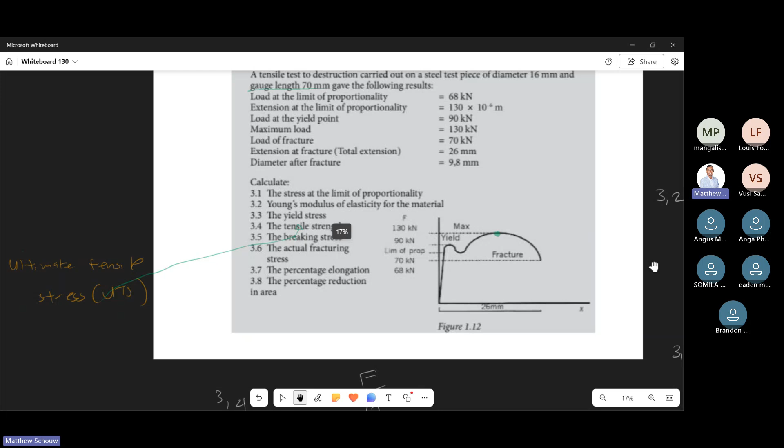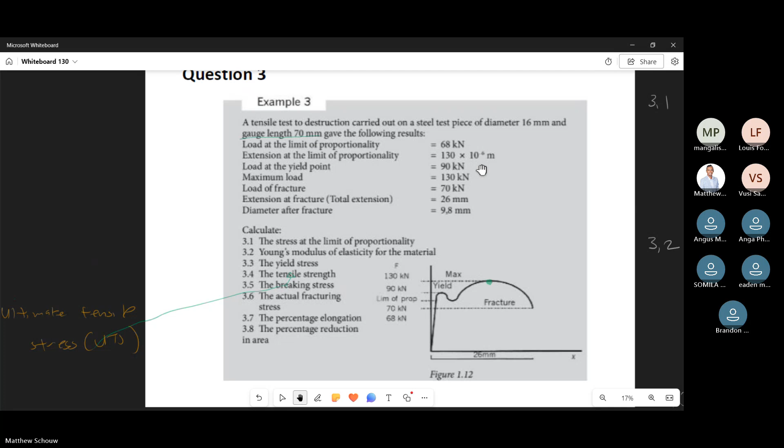So you remember that sketch I showed you? So initially we had, how much was it again, 16 mil, and after it breaks, it becomes 9.8, right? So those two diameters. Are we on the same page? So we just put in the 16 squared minus, what is it, 9.8 squared, divided by 16 squared.

Brandon, Lucy, yeah. Mangaliso, got it? Somila, got it? Yes, okay. The rest of the colleagues, do we all get it?

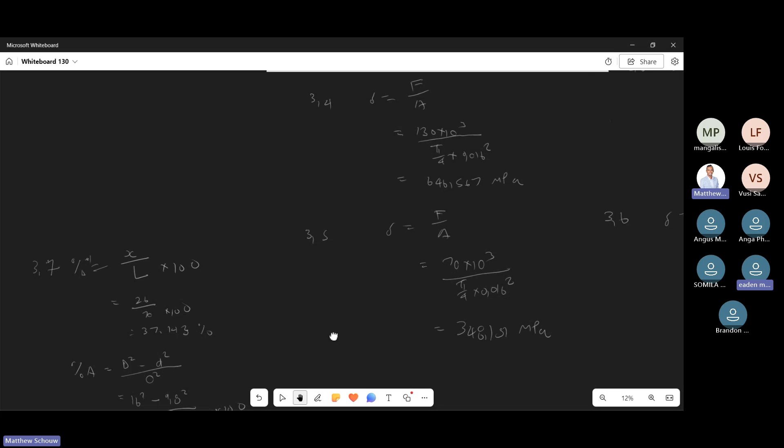Eden, Aiden, Louis, you got it? Yes, okay great, got it. Okay, so guys, I think I'm gonna end it here because it's a lot of things, a lot of concepts which is at play, right?

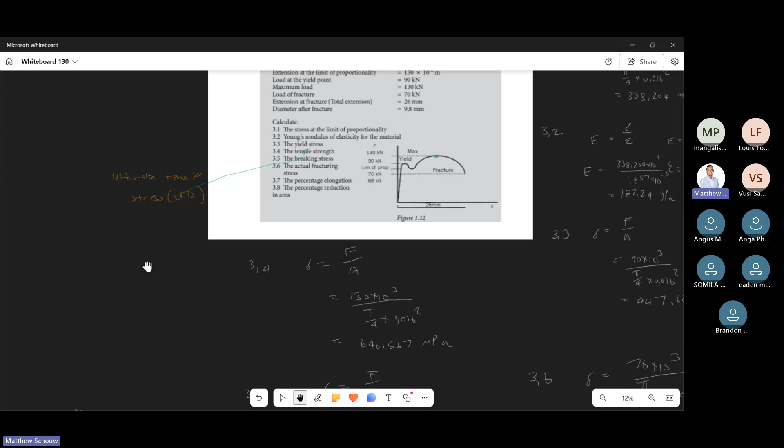I want to make a proposal. Obviously I want you guys to review the session now, but how are we going to conduct the sessions? The best way, in my opinion, is that you have to go through the things before. What I recommend is do the examples, do exercises, and then once you've done the exercises, go to the past papers immediately. Examples, exercises, past papers, so you can exactly see what you're going to be asked. I'll put up a site where you can get past papers or an app, so you can see what kind of question they will ask.

The second thing is, I'm hoping that you guys cover the material and then maybe find certain problems I must go over, then I can go over the challenging ones. Am I clear everyone? Are we on the same page? Yes, yes, cool.

Thanks, yeah I mean, I'd love to teach you guys, but if you'd like me to teach you stuff, I don't mind spending like a good 20 minutes just going over concepts before we solve problems. But I'm not sure if you guys like that or not.

So I don't know, what I can say is for the next chapter we are doing module 2 next, but please make sure you understand the compound bars, because compound bars feeds into module 2 and module 3. Am I clear everyone? Yes. So make sure you spend a lot of time understanding the compound bars part.

It is of utmost importance, like it's a concept which you're gonna need in the next 2 modules. And if you don't know it, then everything else becomes a bit of a stretch, man. Let me just confirm that - yeah, bars in series and parallel, that's what you must know for both two.

Okay, so guys, I want some feedback from you guys. Are you guys happy with us solving problems like this? Is there anything, how can I support you guys further in terms of your preparation? I'm opening the door here, opening the house. Please talk, guys.